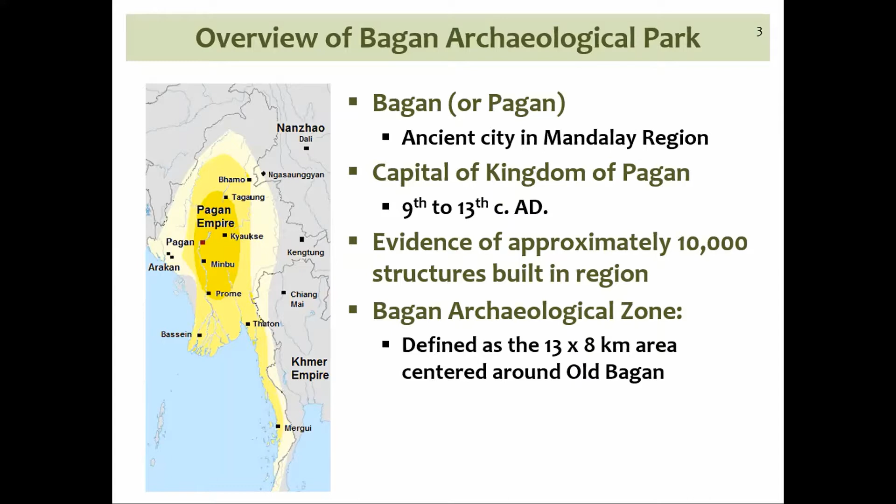That's a picture showing you the different monuments marked, geographically with their geographical coordinates.

There are different zones identified for the surveying, and then the important thing is these sites are sitting on the banks of the Irrawaddy River, which means you have rich alluvium deposits on which these monuments are built.

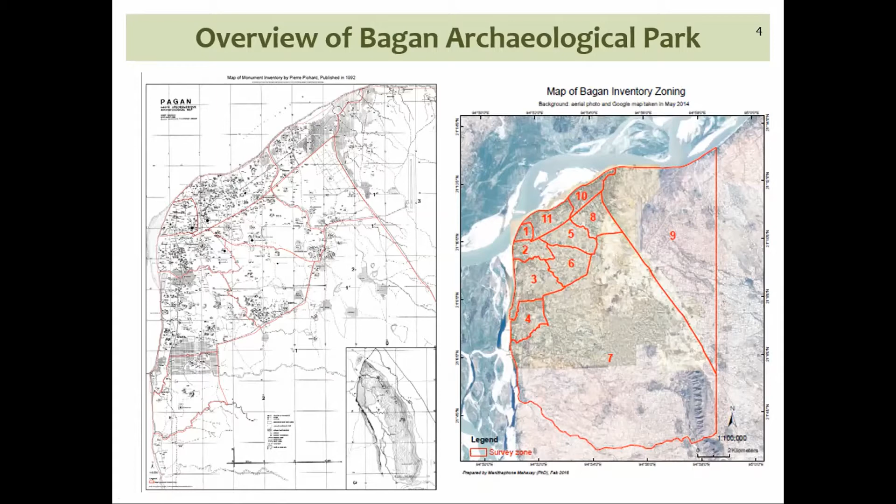And that's also the reason why these monuments are built in clay brick masonry, because you have a good source of clay, and all these monuments have been built in clay brick, burnt clay brick, and very few monuments have been built with sandstone. It's a very small number of monuments with stone. Most of them are clay brick masonry constructions.

One fantastic aspect of the Bagan Archaeological Park is the phenomenal work that was conducted by the French Institute, EFEO, and UNESCO.

Spearheaded by an architect by the name Pichard, who, after the 1975 earthquake, and I'll talk to you about it in a moment, 1975 earthquake documents the entire site, and basically in 8 volumes has covered the.

2,834 monuments with photographs, plans, sections, elevations. I mean, this is a heritage by itself. The voluminous work conducted by Pichard and his team and published by UNESCO in 1992. So this is something, the inventory of monuments is something phenomenal that is present at this site.

In terms of the structural typologies, we're looking at a vast majority of Buddhist temples, and there are a large number of stupas and few monasteries.

And in terms of their structure, they're all brick masonry constructions. They're massive constructions. Some of them are 3, 4 multi-storied constructions.

Some of them are just solid stupas. The temples have different features. Some of them have a central vertical core on which the spire sits. Some of them do not have these cores. Instead, they just have vaulted roofs on which the spire sits.

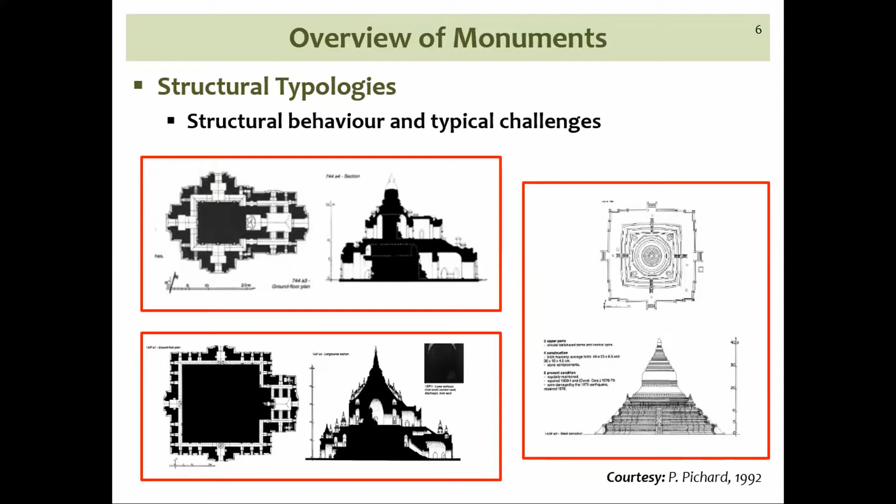There's a classification of the structural typologies at the site between the stupas, the Buddhist temples, and the monasteries. But almost all of them, 99%, would be brick masonry, clay brick masonry with mud mortar construction. About 450 to 500 of them have mural paintings, a huge number of monuments with very intricate mural paintings from the 11th century to the 18th century, and also incised plaster work in many of these sites.

In the recent past, Bagan was affected by two earthquakes. Of course, in the last 700, 800 years, there have been innumerable earthquakes. The 1975 earthquake is well documented, and the 2016 earthquake, 41 years later, is also very well documented. These happened almost at the same site, quite close to each other. The two earthquakes are also comparable in magnitude: the 1975 Bagan earthquake was about magnitude 6.5, whereas the epicenter of the Chauk earthquake was magnitude 6.8. Historical records show the damage in the two earthquakes is also comparable. So you can almost imagine this place is going to be affected every 40, 50 years by a significant earthquake.

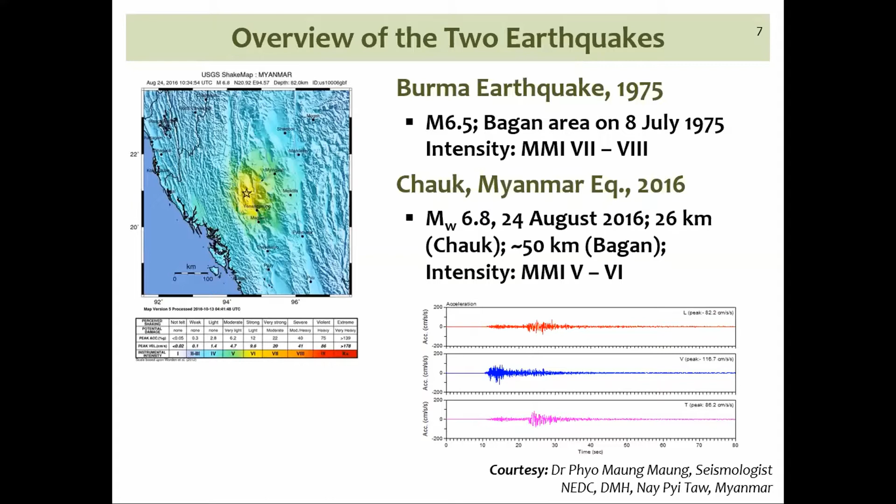After the 2016 earthquake, 389 was the number originally recorded, but that number grew to about 404. Today we have about 3,600 odd monuments listed, which means almost 10% or more of the monuments were affected. Out of this 10%, about another 10% of the affected monuments were critically affected. So about 40 out of 400, out of a 3,600 stock, was really affected.

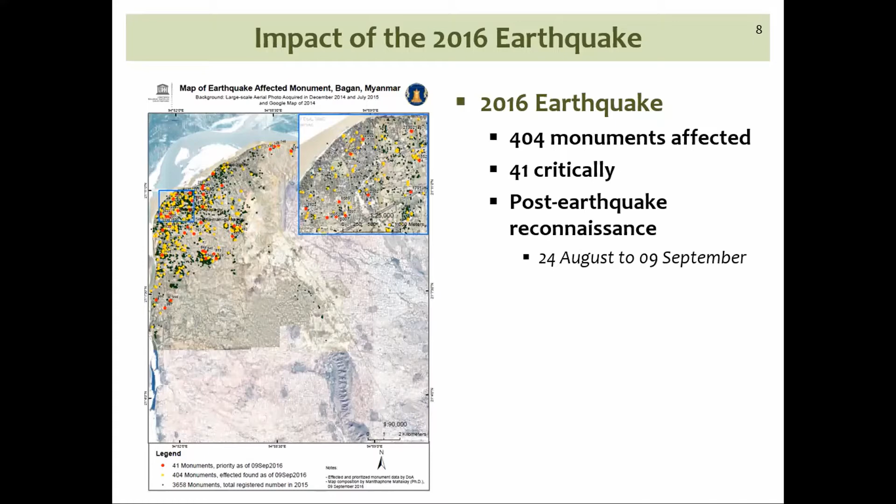Post-earthquake reconnaissance was done from the 24th of August to the 9th of September, and this happens in stages, with more detailed reconnaissance conducted over time. Detailed surveys are required before interventions are even carried out. The picture on the left shows the red, green, and yellow tag distribution of the monuments. Red means severely damaged and structurally compromised, yellow means there is some damage and care should be taken if these monuments have to be used, and green means the damage is quite minimal.

Before deciding what interventions to take, you might first do a rapid assessment followed by a detailed assessment to understand the type of damage, and then an even more detailed assessment to design structural interventions. There may be immediate emergency stabilization originally, but as detailed assessments proceed, that emergency stabilization is slowly removed and the main interventions are carried out. This can take a few years, from 5 to about 10 years of detailed assessment and intervention strategy.

The detailed assessment then leads to a rehabilitation strategy, and you need funds. Imagine a site where 400 monuments are affected, and the rest also require daily care and maintenance protocols, but 400 of them really require interventions that may exceed the budget of a given Department of Archaeology. So it's not straightforward, it gets extended over time. Today we are about 6 years from the earthquake, and interventions are still being carried out in many of these structures.

The quality of the work is extremely important, and it's interesting because in 2016, when this site was affected by the earthquake, the department was preparing the dossier for the World Heritage nomination. It was a very critical phase, and then the earthquake affected a number of structures. The problem was they were in a hurry to do repairs because the nomination process was underway. So UNESCO and the experts working there told them to go slow, because if they carried out repairs and compromised the authenticity of these sites, the nomination process might get compromised.

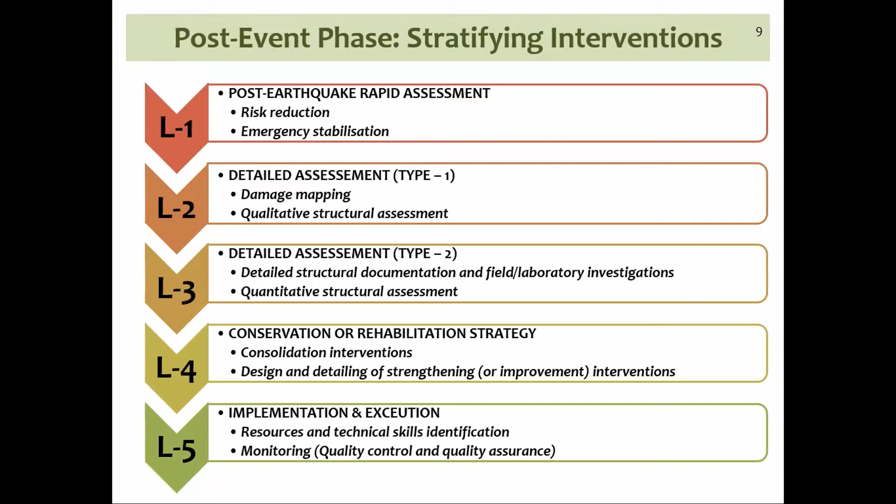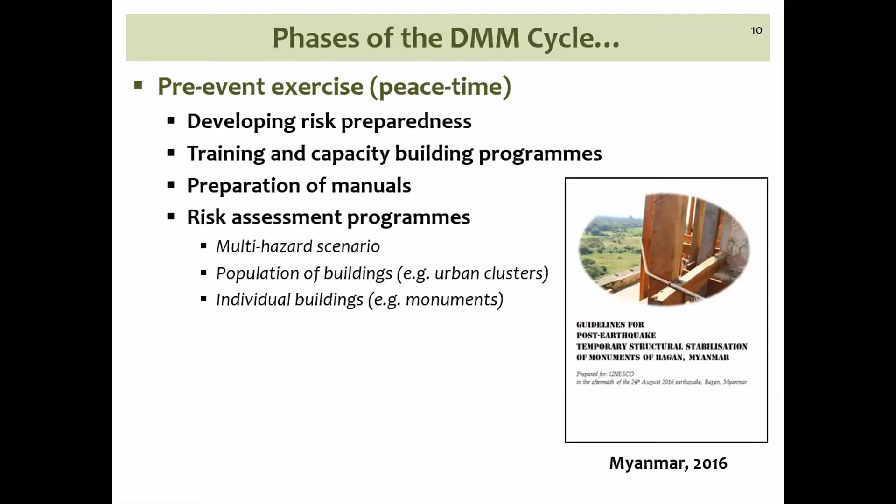So this is actually a peacetime exercise, but since a systematic process was not in place after the 2016 earthquake, UNESCO had to fund a process so that they can consolidate guidelines for post-earthquake temporary structural stabilization. Similarly, rapid visual screening forms. In fact, there were many rapid visual screening forms being prepared by multiple countries, but they were not focused on earthquake damage. They were focused on basic structural situation, mural conditions, and so on. So they didn't have an RVS form that could be used immediately.

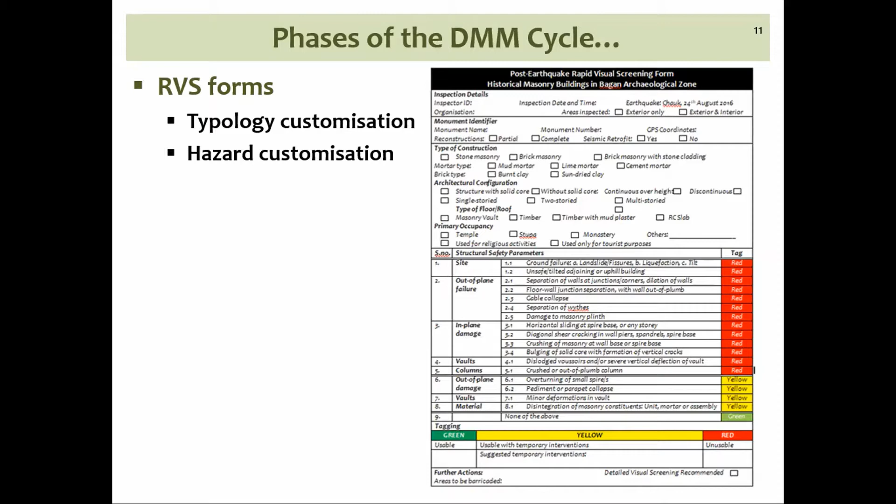So these are the activities that should really happen during the peacetime, so that you're ready with protocols and training for the event itself. Of course, this should not be only for earthquakes. This should be for different hazards that a site can actually be affected by, natural hazards or human-made hazards.

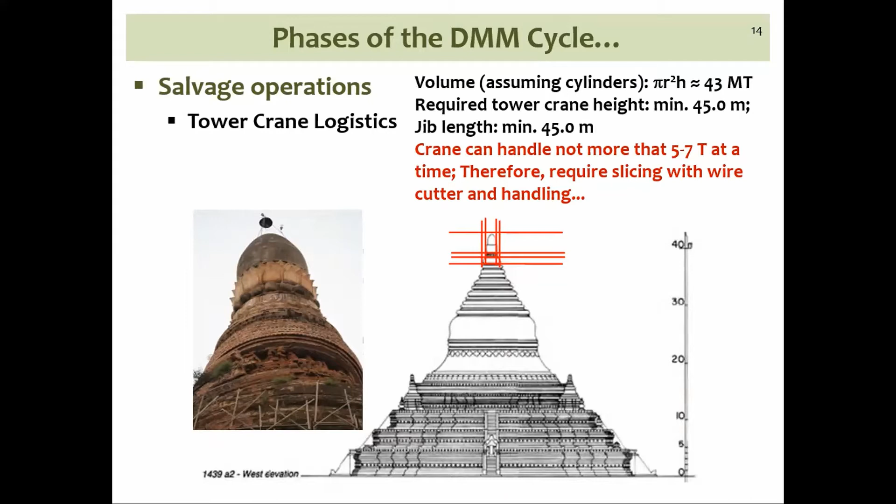Over a few months, it had to be dismantled. Then emergency stabilization - you get into looking at monument by monument, the kind of damage each monument is showing, and the kind of repairs, meaning the stabilization, each of them would require.

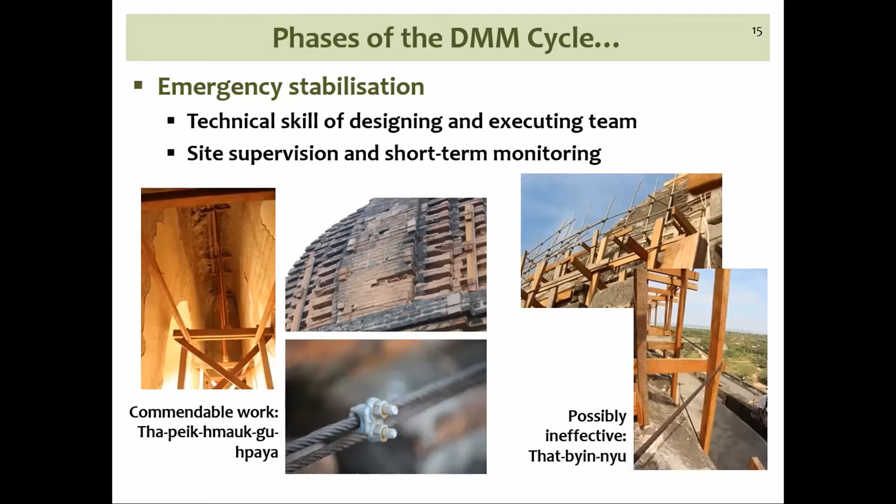This just gives you an overview. Different types of techniques would be required depending on the type of damage. The training of the team executing and designing it is important. Site supervision and short-term monitoring is also important in such situations, because if done with a poor understanding, it can actually cause further damage in an aftershock, or even in incidents of rain, you can have sudden collapses because of rainwater going into the structure and affecting the equilibrium.

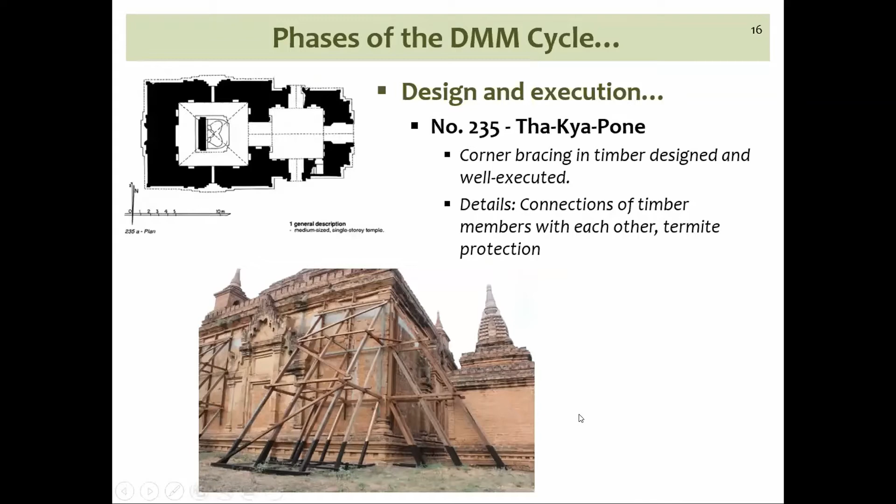Moving forward, here's an example of how a corner support system had to be designed and then executed by the members of the civil works team. Here you can see a huge spire. At the base of the spire, there were PT cables, post-tension cables.

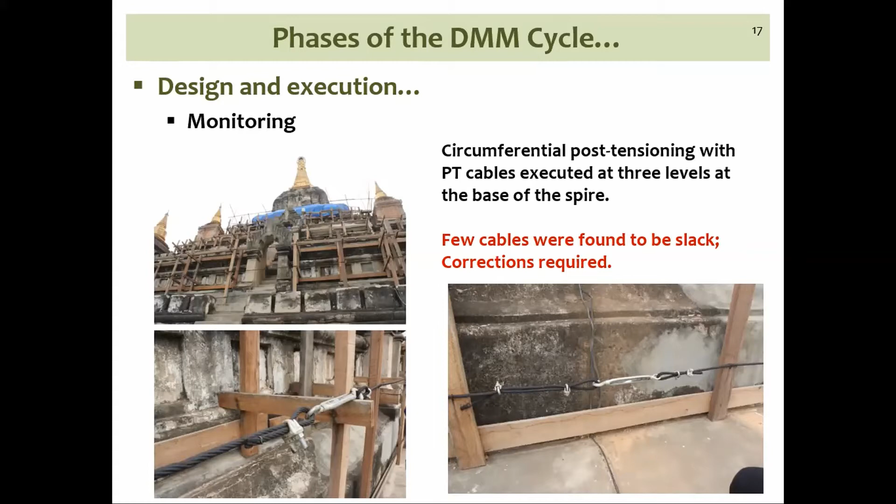These cables were basically trying to confine the monument from all four sides. But these PT cables have to be taut, and if they are not taut and they slack off, they're really ineffective in being able to confine the structure. So it requires monitoring over time. Some damage locations, as soon as you see the damage, you try to put in monitoring devices so that over time you have information on whether things are improving, stabilizing, or worsening over the monitoring phase.

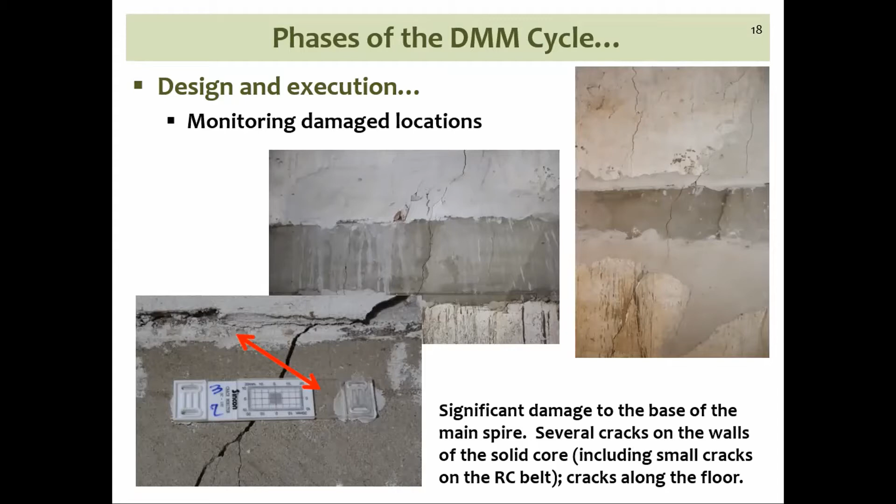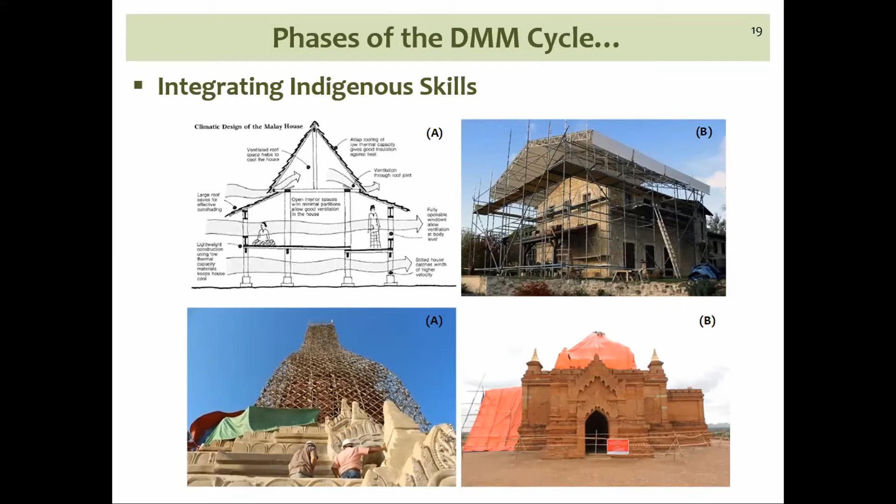The temporary weather protection system really protects the area because of the Irrawaddy plains - you have heavy breeze and showers, and this can actually affect cracked portions of these buildings. So all these spires had these nice crocheted hats put up to protect these constructions. So a lot of indigenous skill and a lot of human resource available to be able to do such things.

As we move forward in the DMM phase, institutions like UNESCO and several other countries would then come in and say, okay, we'll do a pilot project, we'll pick up an example, we'll take you through all the specific phases that you must rigorously do, and then get money through donors for executing it. So this is one example - UNESCO wanted to do one pilot project after the 2016 earthquake.

Monument 2162 was one with a lot of mural paintings. In fact, a very interesting monument, because in the 1975 earthquake it was damaged and interventions were carried out in the form of reinforced concrete bands, but they did not complete putting the bands in all the floors of the structure. Because of which, in the 2016 earthquake, the upper floor of the structure got damaged while the lower floor, the floor with the murals, was salvaged, but the floor above got very badly damaged.

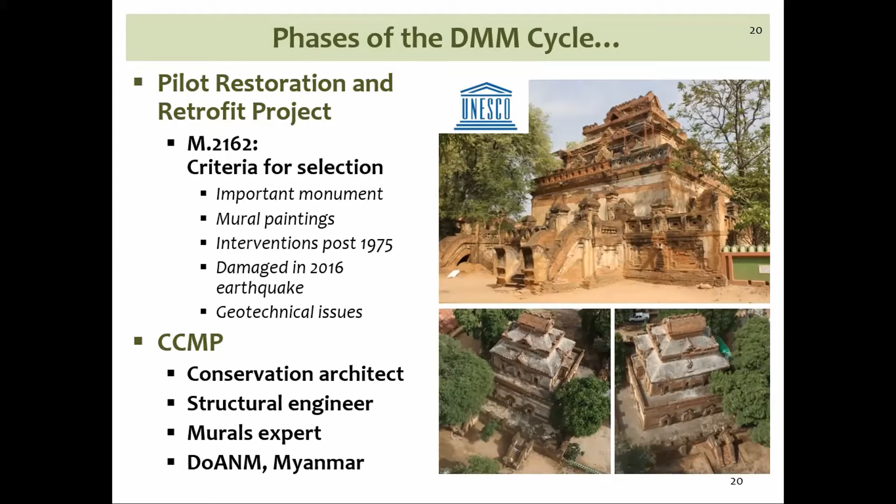So then UNESCO put together a multidisciplinary team to prepare the DPR for this particular pilot exercise. So this is a few pictures of the monument. You can see this is considered to be the Sistine Chapel of Bagan. You can see the extensive mural work and the sort of damage that has happened to the structure.

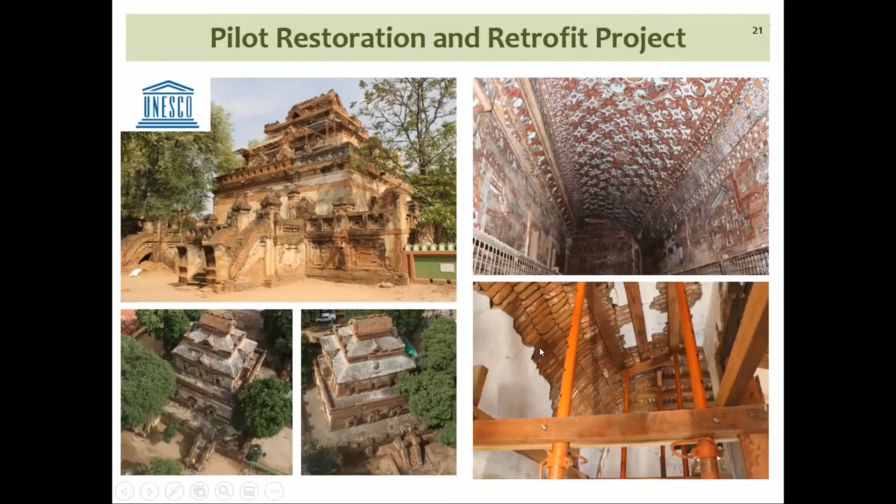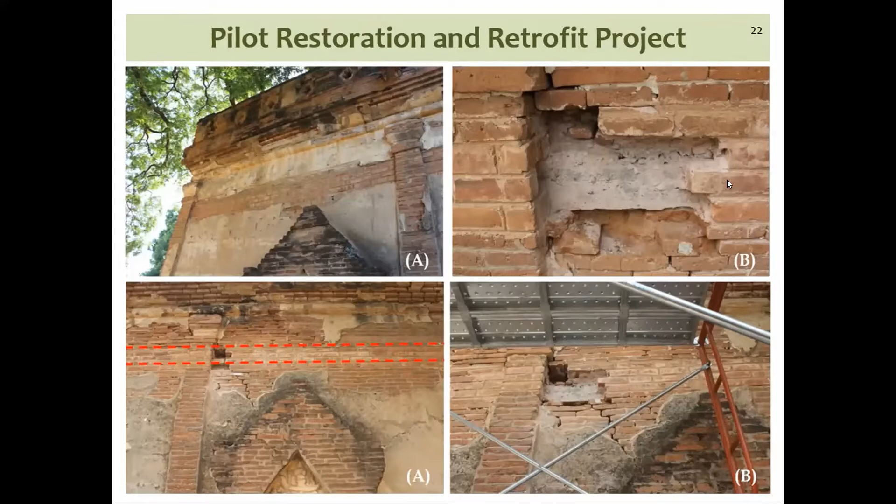You can see this is the ground story of the structure. You can see some new bricks, a band of new bricks. In fact, what really happens is at the ground story, a reinforced concrete tie beam was introduced as a confining tie beam to protect the monument after the 1975 earthquake. As per design, these tie beams were supposed to be put at the two upper floors as well, but this was never executed. So in the 2016 earthquake, the upper stories suffered damage while the lower stories were protected. So you see, unless things are completed, you have further complications that can happen in sites like this. So this was taken up as a pilot project.

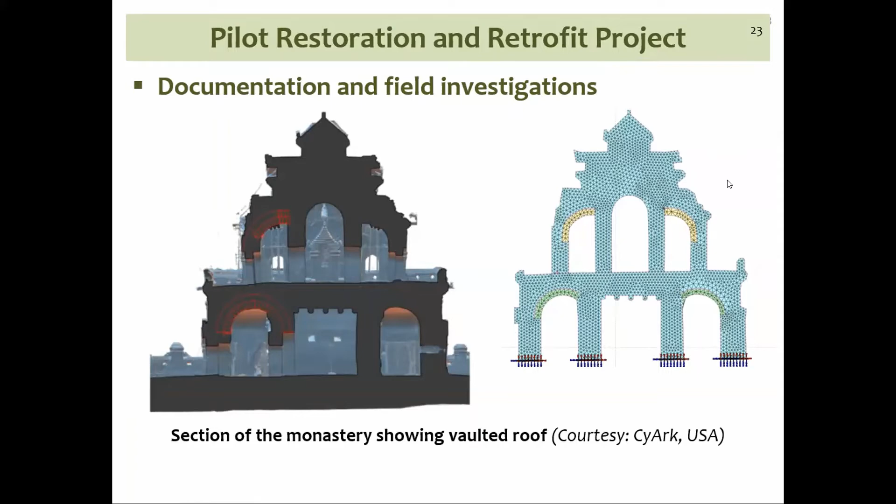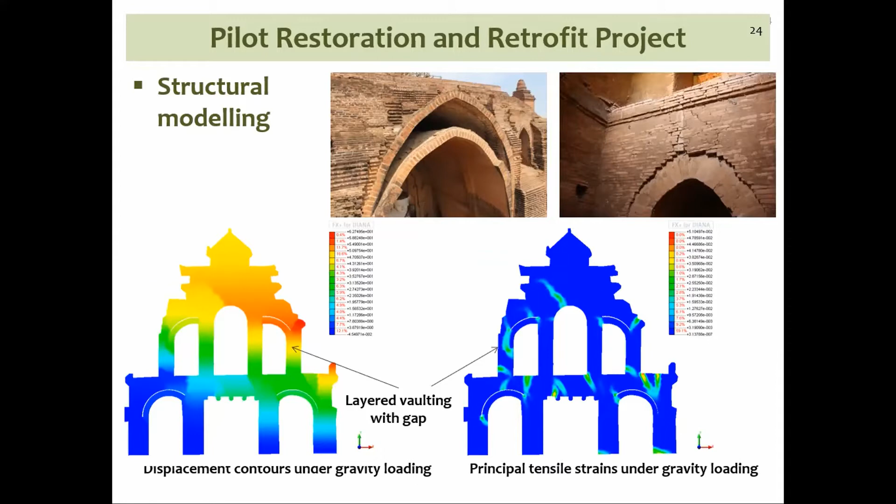Structural modeling is done for this one specific monument. We tried to spend time and do something in a very detailed manner.

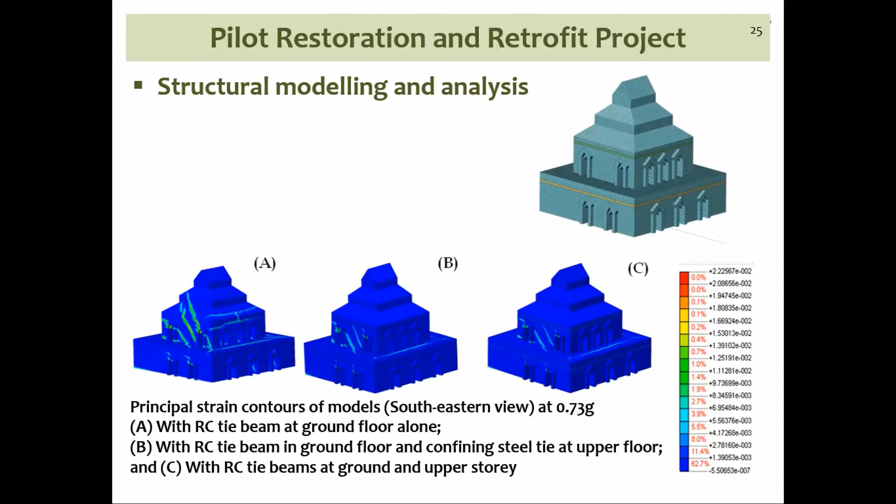We worked out what if we propose putting a reinforced concrete beam in the upper story, or should we go with a steel exposed tie and not use reinforced concrete because of compatibility issues. We worked out different options and demonstrated that the intervention at the upper stories is critical, and gave options for what could be done.

Finally, this is currently under restoration, and despite the problems of the pandemic and the civil unrest happening there because of the regime change, work is progressing, and now they've reached the structural rehabilitation phase of this project.

That was a 6-month project. I just want to close by giving you an idea of this project that's currently running. In 2016 the earthquake happened. UNESCO wanted to do a pilot project and thus started in 2017, a 6-month project. At the end of the 6-month project, all the estimates and everything was ready for the procurement and the work to start on the ground.

A multidisciplinary project was conducted. The work did not immediately take off because of several issues, but is going to begin. So the amount of time available for research and development was about 6 months immediately after the earthquake.

But then a place like Bagan has a number of foreign agencies that come in, and one of the prominent ones is the Getty Conservation Institute. Their interest was to do long-term capacity building and pick one monument as a demonstrative monument to carry out the complete intervention itself. But before the intervention, a 5-6 year period is dedicated to research.

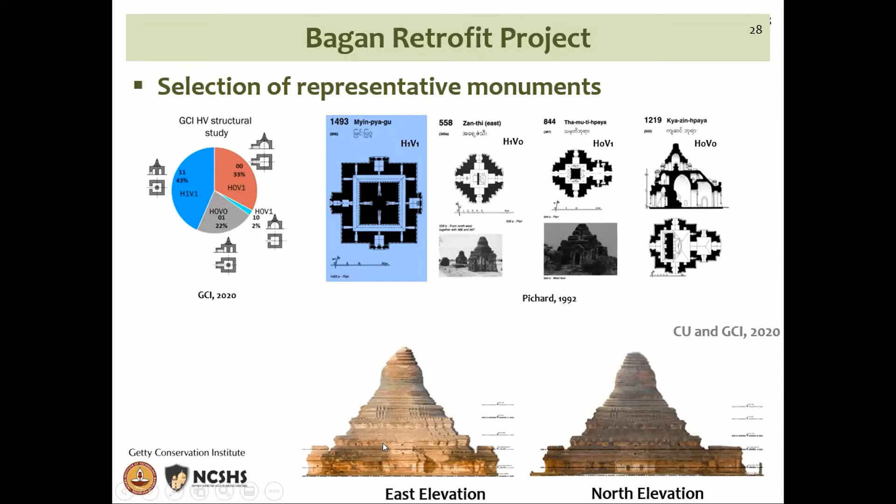So we got an idea that you could very nicely classify all the monuments in Bagan into these categories. Then, for each of these four categories, we took one representative example and did a very detailed study of each. For the first one, we picked monument 1493. Each monument has a number because of the large number of monuments there. This one is called Myin-pya-gu, MPG for short, and under each category we are studying one monument in detail.

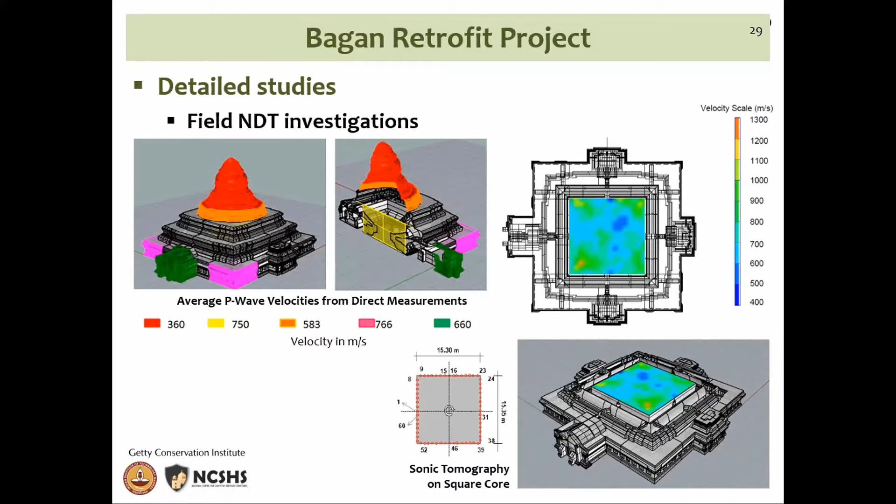We were meant to do this for all four representative monuments, but we could only complete one because in February and March 2020 the lockdowns began. So we finished that one, and we've taken up detailed studies of each. Only for this monument do we have detailed field information, whereas for the others we only have geometrical data, not material information. Anyway, the project is going on despite the complications.

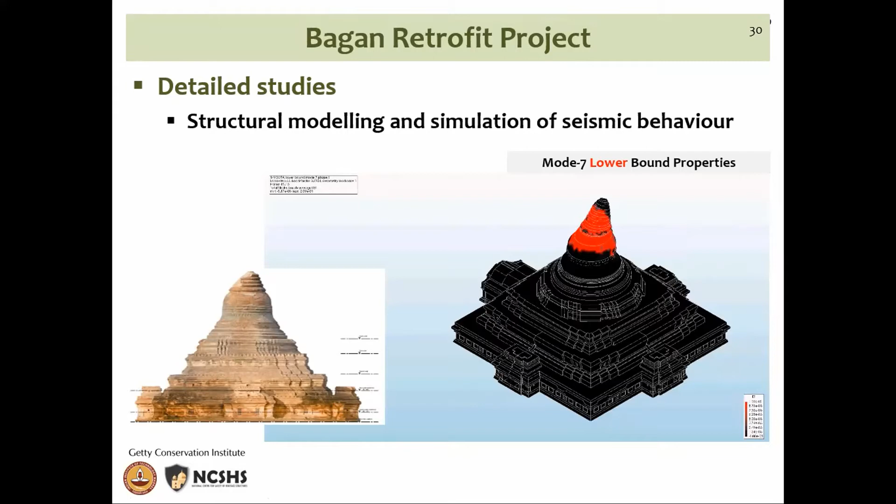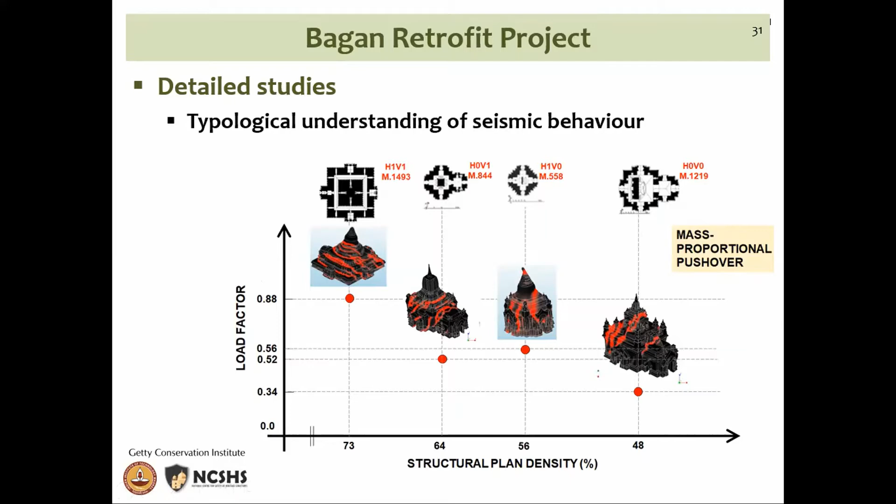That's just a concluding slide showing, for the H1V1, H0V1, H1V0, and H0V0 categories, the detailed models. We're trying to understand the different structural features and the kind of behavior each would have under earthquake action, and what strategies to take for each of these typologies broadly. That is a starting point for planning interventions at a much larger scale at the site. This is not just about 4 independent monuments of those typologies, but the idea is to extend it to the 2,000 or 3,000 odd monuments at the site.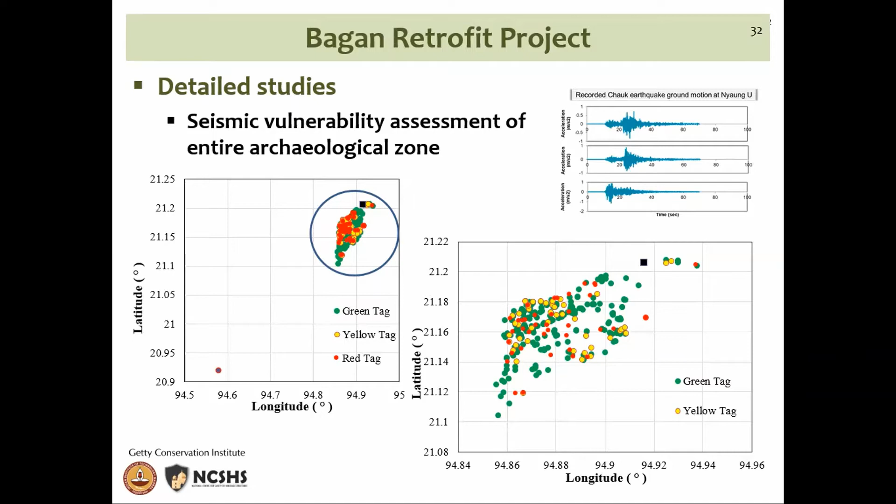We're also trying to take this forward in terms of the seismic vulnerability assessment of the entire archaeological zone. We're trying to create methods to be able to do that, so you can identify and prioritize monuments which need interventions but did not get damaged in the previous earthquake. That's the intent of the exercise. If you can identify vulnerable monuments that haven't been damaged in previous earthquakes and plan interventions for them, you'll be able to reduce the risk to the site over time. That's the whole intent.

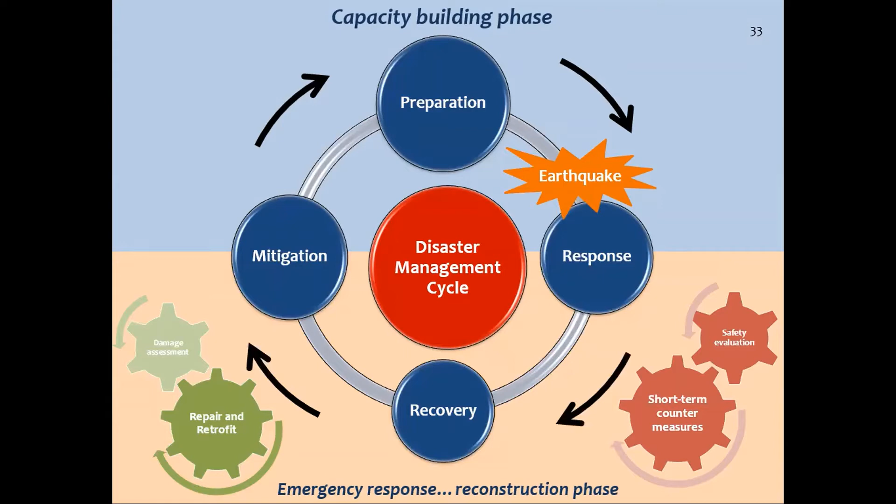So I think with that, I'll stop. I just wanted to give you an overview of the different phases that typically occur in large archaeological sites such as this, where the luxury of resources is sometimes available and sometimes is not.

But we have the special problem of the pandemic and the military regime creating complications which we never expected. We were actually going to go back to the monument and complete the detailed investigations for the second, third, and fourth typologies, which is not happening now.